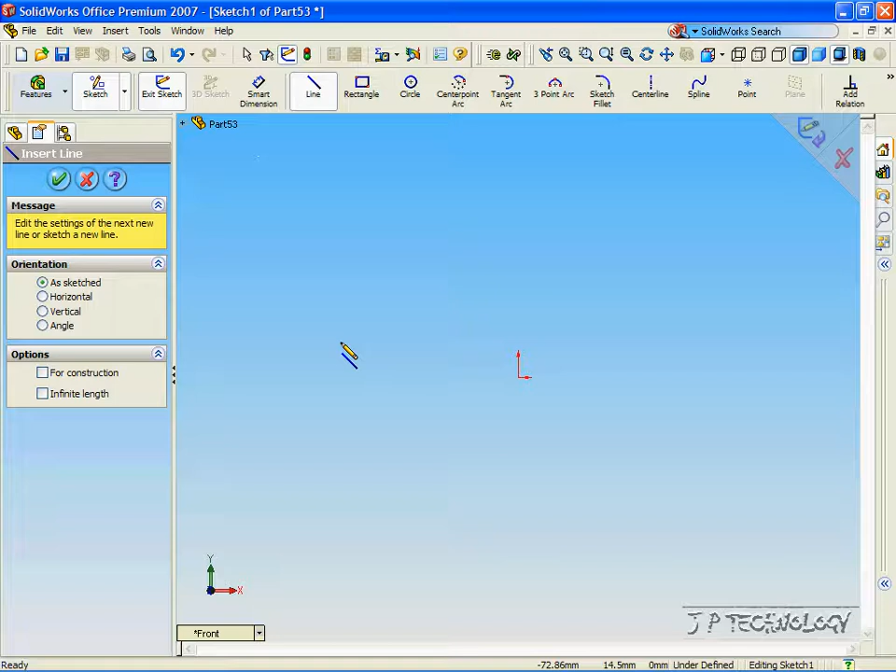So let's make a line up top, bring it down, and keep going down until we get the dotted blue line.

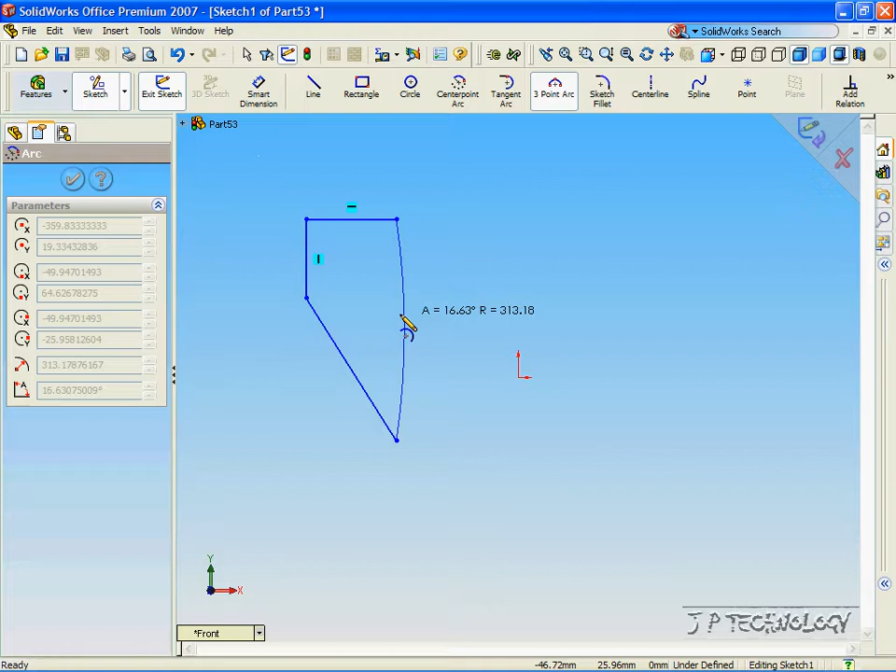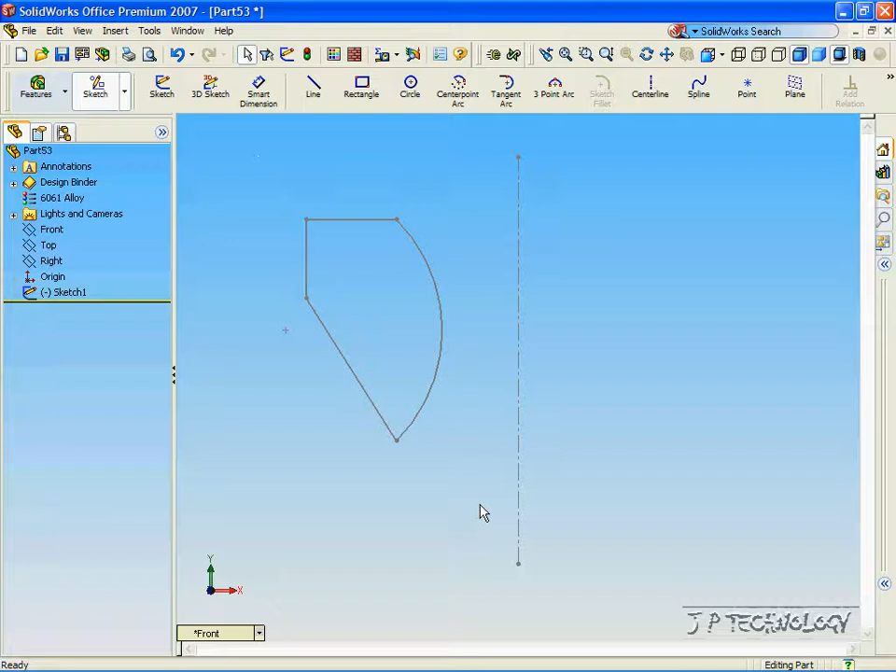Now we are going to put in a center line, which is going to be the line where we are going to mirror the sketch. And bring it straight up. Click OK. And now we've created the sketch, and we've created the line in which we're going to mirror it.

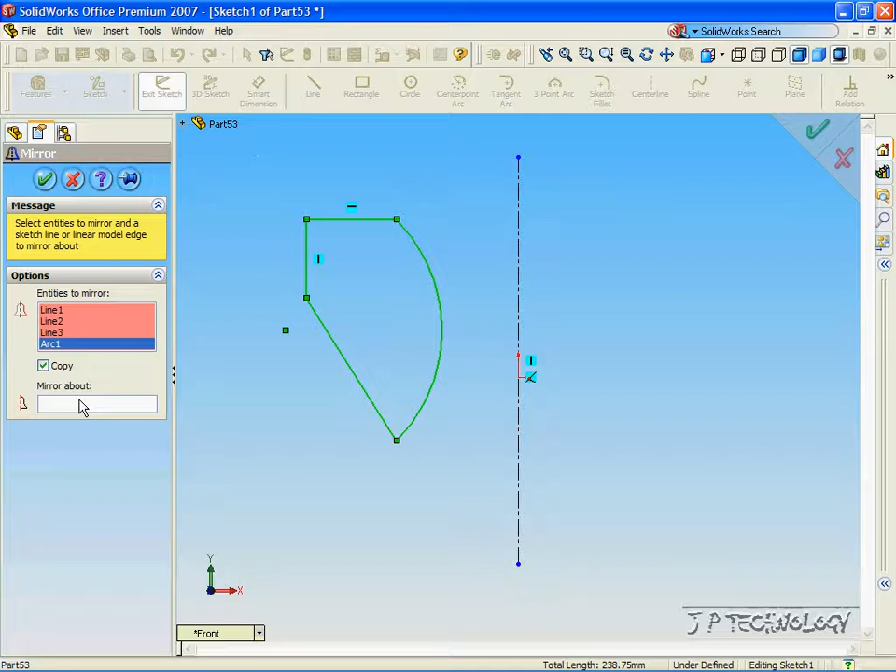Now to mirror it, let's right-click the sketch, click Edit Sketch. Now let's open up the mirror function. Now we're going to have to mirror the entities. The entities are every single line that we drew. And now click the center line that we made to mirror it about. Click OK. And now we've mirrored our first sketch on the other side of the center line.

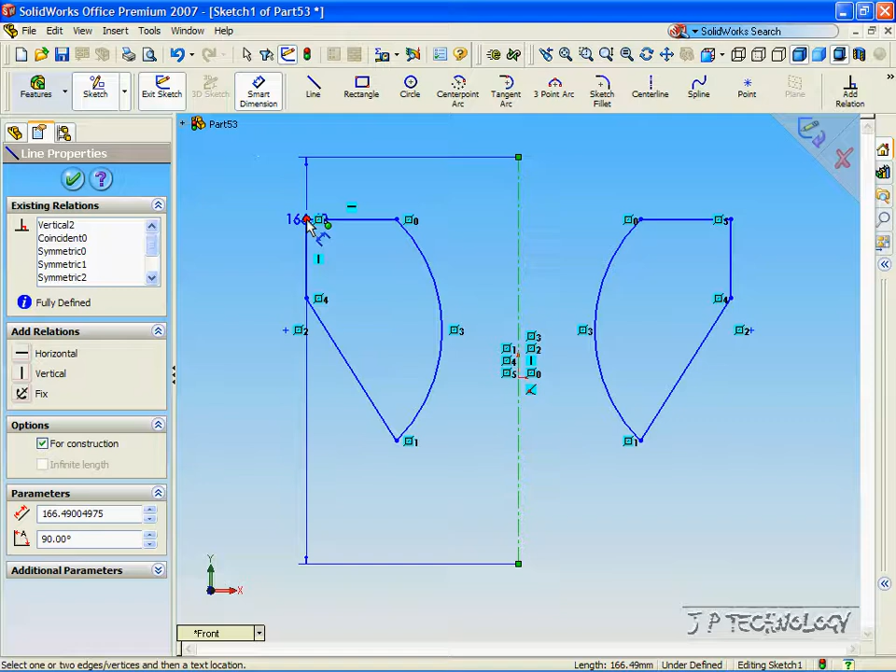Now we can keep going, and we can make a Smart Dimension. Click the center line, click a point on the first drawing, and let's say we'll make it 150 millimeters away, and both are affected. So we can still manipulate the right-hand drawing by changing stuff on the left-hand drawing.

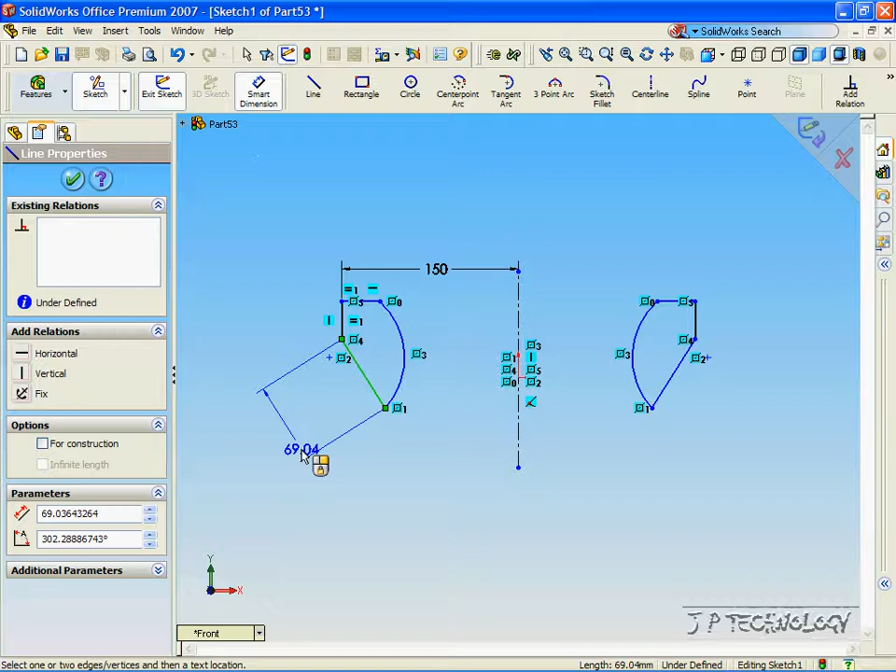So let's click the Add Relation button. Let's make this line equal to this line. Click Equal. Click OK. And let's click the Smart Dimension tool, and let's make this line 70 millimeters. Click OK.

And as you can see, whatever we do to the left-hand sketch, it's reflected in the mirror image on the right hand. Click OK. And still with these two sketches that we made, we're still able to extrude parts from them.

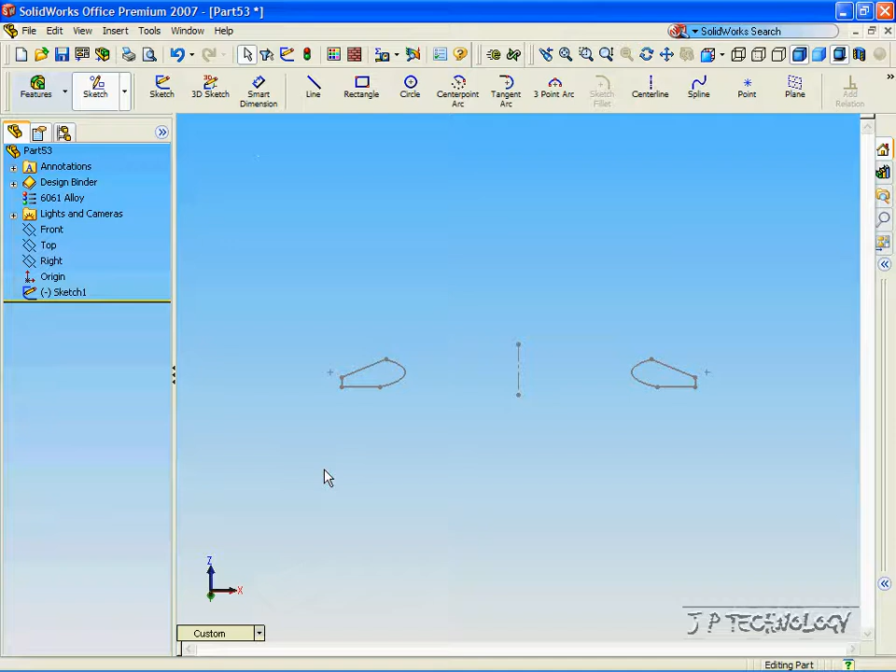So let's click the sketch, click Feature, click Extrude Base, and as you can see, we can still extrude out from them. Click OK, and we've created two identical parts.

And this concludes our tutorial of the mirror sketch function.